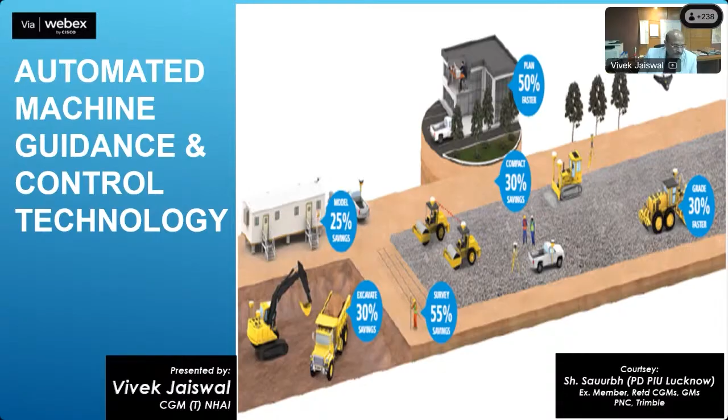As our chairman sir has directed, we are adopting these technologies and trying to do some work with this technology. Accordingly, our member sir, Anil Chaudhary sir, has guided us to process the complete system of its implementation. Before that, let me inform you.

This technology is being implemented in NHAI at one of its projects at the Lucknow-Kanpur section by our project director Saurabh Chaurasia. He is doing dedicated work in this field, and he has even created audio clippings for all of us. I'll share those audio clippings also with you all.

Let me tell you that this technology was first started by our ex-member R.K. Pandey sir and his team. When Giri sahab and Naveen sir took this up, they got cognizance of this technology and then included it in one of the projects in Lucknow-Kanpur. Accordingly, that work has been started by PNC, and PNC has consulted Trimble to help us implement this technology.

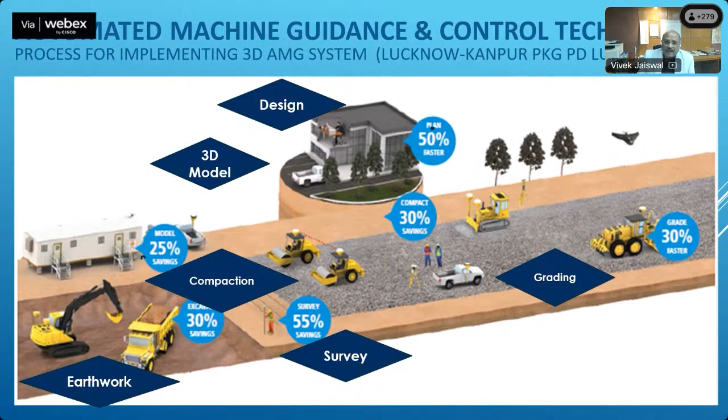Before that, let me tell you today's contents: the governing IRC guidelines and MORTH specifications, then the general process, then the basic principle of this technology. Then we will discuss the available systems to adopt the 3D automated machine guidance. Then what expected output I would like to demonstrate, then its financial implication and implementation procedure, what we have adopted to implement in all our projects.

In the present scenario, after observing the success on our package, we have introduced to the DPR cell a text in Schedule D, which I'll discuss with you in the last part of this presentation.

First of all, the IRC specifications where compaction and compaction equipment have been mentioned. It is mentioned at para 4.3.3 of IRC SP 97 2013 that the intelligent compaction system has to be adopted.

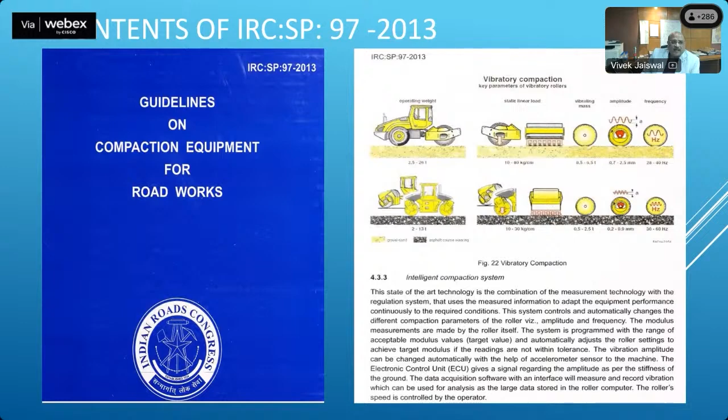This is one of the things we have to address through this technology, and we are trying to adopt this. Further, we have to lay the embankment in layers of not more than 250 mm. This is one of the factors where we generally face a lot of challenges, so this can also be addressed, that every layer should be done in a thickness of 250 mm.

This earthwork part is generally done by subcontractors and petty contractors, so the quality has to be ensured. Even the main contractor is sometimes not able to address that quality. So let us proceed with the technology so that it automatically comes into the process. That is what we have tried to adopt. Laying the embankment, subgrade layers in 250 mm or 200 mm thickness, this can be achieved through this technology.

Also, one of the things is the level of the surfaces - our WMM surface, earthwork surface, or subgrade surface - has to remain within the tolerance limit. The tolerance limit is somewhere around plus minus 20 mm, and in case of subbase it is plus minus 10 mm. So these surface levels have to be maintained within tolerance limits.

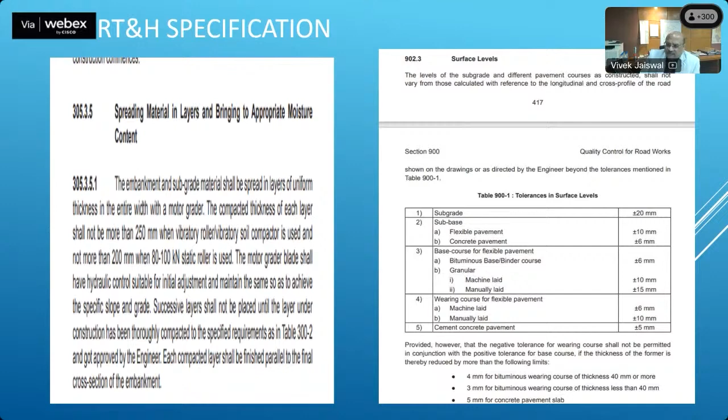This helps us because whenever there is a sag, water may get accumulated in that sag portion, and that will gradually deteriorate our pavement because of that. So we will try to keep the surface levels within tolerance limits through this technology.

Further, in IRC 97 itself, there is mention about the laying temperature and rolling temperature. This can also be addressed when our paver is there - the sensors will be there and we can map the laying and rolling temperature.

And now the compaction part. This is the main thing mentioned in para 4.3.2 relating to relative compaction. Let me read this text, what we are going to do with the help of it: the compaction analyzer registers all the CMV - CMV means compaction meter value - this data, and allows the operator to see the compaction result on the computer screen.

This is what we have done in this technology. A computer screen has been provided in our grader, in our compactor. All this can be seen in a video.

I'll show you. On the basis of experience or existing calibration, the CMV limiting value can be used for each separate compaction job - each layer or each particular segment. Now the compaction analyzer indicates each area that requires additional compaction. This can also be seen, I'll show you how this can be achieved.

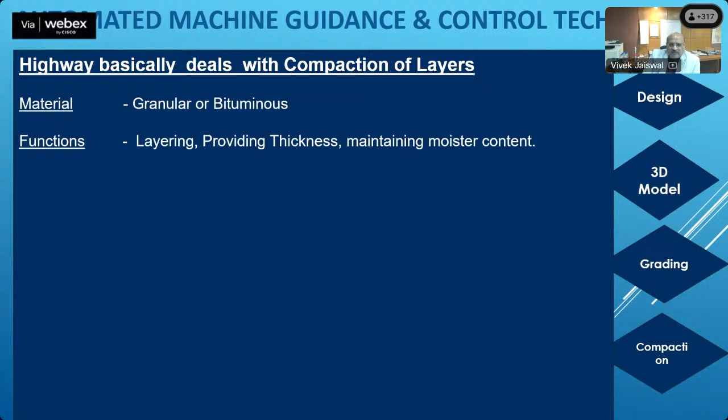Today we are discussing only the compaction part, because once we address compaction, a lot of hurdles will be removed. As you see, our Delhi-Mumbai expressway is attracting some criticism, but just because we have missed some compaction quality, our whole bituminous course is getting deteriorated at some places. But anyway, by adopting this technology we can improve this, and for these functions we are adopting this grader, soil compactor, and paver.

Then, by doing all this, the controlling factors we need in the geospatial thing are positioning, horizontal coordinates X and Y, then compaction, then levels and degree. Positioning can be achieved through GNSS and DGPS, and compaction can be done by our vibratory based sensors and roller passes. Levels can be achieved through auto level and GPS. Temperature can be captured by sensors and infrared.

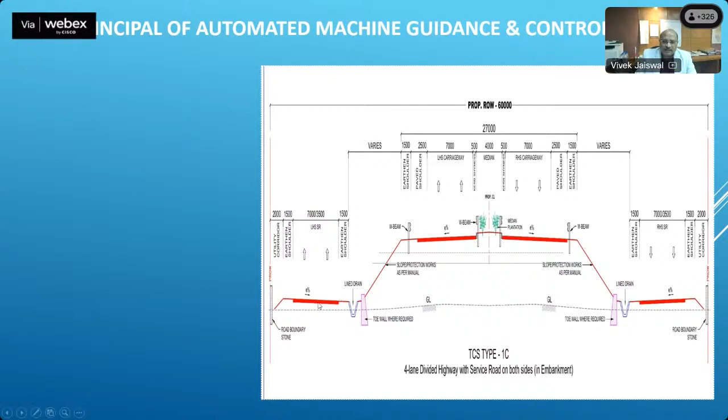So here is the cross section, and these cross sections are being controlled with level and positioning by sensors, software and DGPS for our embankment, subgrade, GSB, DBM, BC - these courses, right?

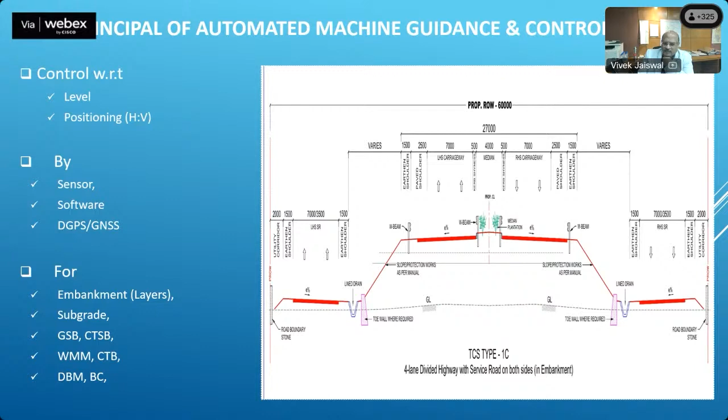Now, this is our bed. In this bed, this compactor or paver or grader is working. Now its vertical position will be controlled with this technology, where our compactor, grader or paver is moving, at what elevation it is moving.

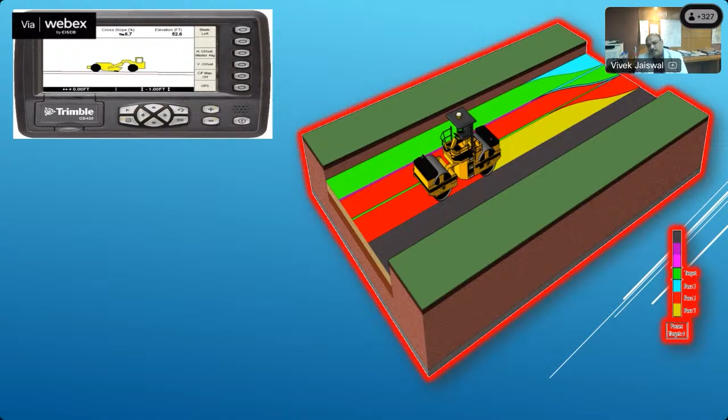It is so precisely being captured. We are able to capture it to the tune of 20 mm, 15 mm, and with the use of this robotic total station, we can achieve it to the level of plus minus 5 to 6 mm. Further, its horizontal positioning can also be controlled - the horizontal positioning of this equipment - and we can control the compaction part.

Now, how does this technology work? Basically, from the design, we already know the XYZ coordinate of that intermediate level or layer or the finished road level. So we monitor the positioning of these equipments, our compactor, our grader, through this satellite data, geospatial data.

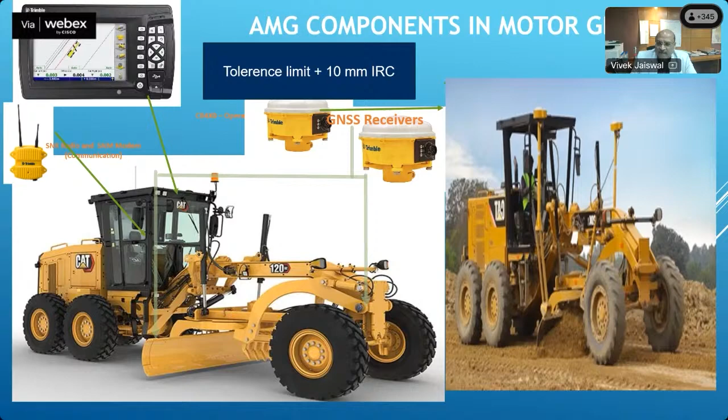And this complete system is now free of all this putting of stakes and strings. This complete process of automated machine guidance automates the process of laying and compaction. You can see in the pictures that generally we have to adopt this process of surveying, and the operator has to depend on the surveyors, who direct what level we have to achieve. So all this will be eliminated, and we can do the work even in day and night with quality. Also the human safety hazards can be eliminated with this technology.

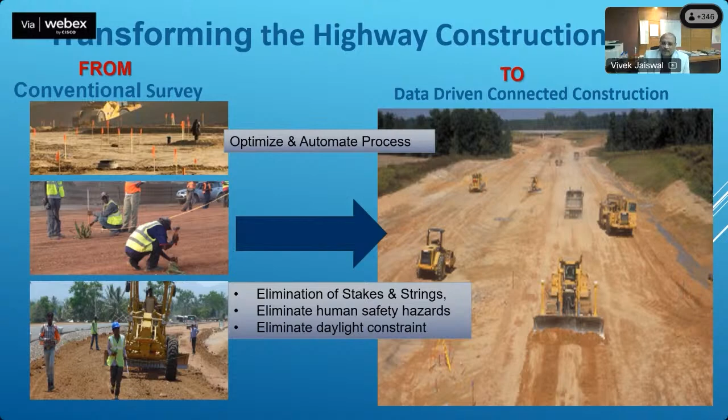These are the things that we can fetch out from this technology.

Now let us discuss the output of this grader. As you see, this green part and blue part at the end here—this is basically the portion where the grader used to raise by 250 mm and keep the layer in 250 mm thickness. Anything which is left or cannot be achieved is recorded in the color coding form.

So this technology can be used to get data in the form of color coding for adopting construction of embankment in layers of 250 mm or 200 mm, which can be automatically recorded in this system, and this data can easily be discussed with contractors. Even the contractor will try to keep everything within the tolerance limit, like laying layers in the thickness of 250 mm. This challenge of laying the embankment in layers can be achieved and brought into the process through this technology. This is what we understand from this, and we are sharing it with you. Further, any enhancement in this can also be pointed out by you so we can proceed with that.

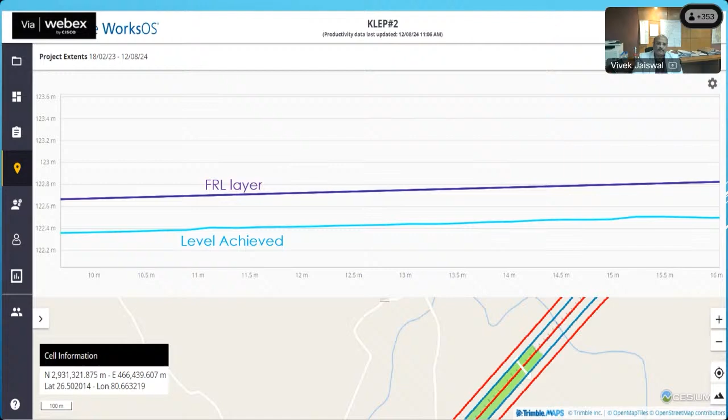Similarly, we can also get what FRL we have to achieve and what level we have achieved so far. This data can also be fetched from this technology. Also, for a stretch of 10 kilometers, we can see what level has been achieved—this is the OGL, then what is the subgrade level, what is the CT GSB level, what is the WMM level, and which stretches have achieved what level. This can also be fetched as an output from this complete system.

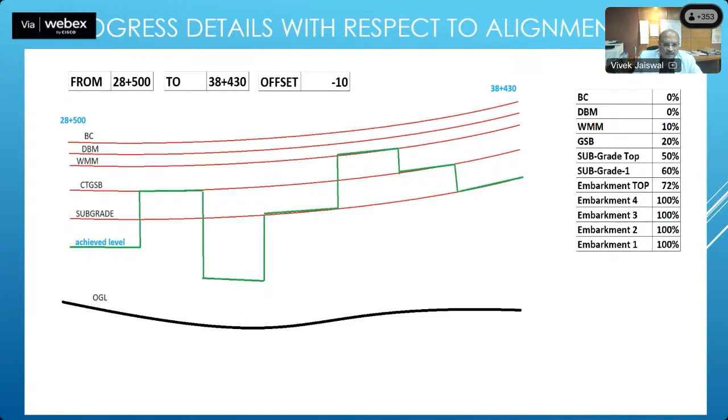Now, this is a compactor. In this compactor, we generally put this CM310 compactor meter in the roller. With the vibration of that, we can capture the compaction value. Here also the GNSS instrument is there to relay its position.

Now in this process, at present we have two things. We proceed with our test bed in which we do the sand replacement method for our FDT, where we have to achieve 95% of lab density. In that case, we decide the number of passes required to achieve this 95% field density. At the same time, we calibrate the field density achieving the level of 95%, and what CMV value is required for that. So that CMV value can be checked and fed into this system to know the compaction of each part of our stretch.

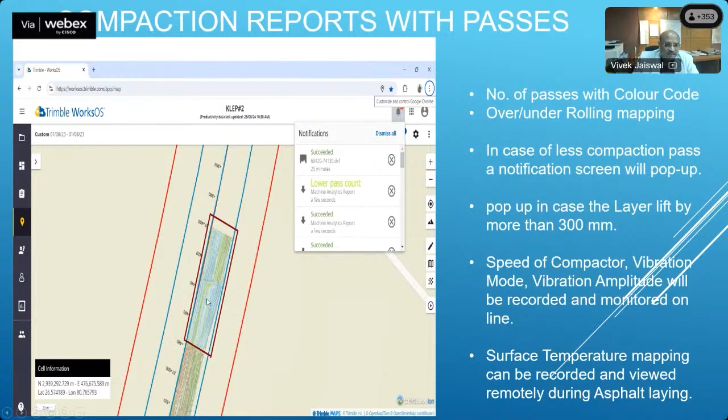Now in this case, the number of passes—these are the number of passes where we have given different colors. You can see where the number of passes has been achieved and where it has not, where 2 passes have been done, where 5 passes have been done. With this data, you can see where the required compaction or required passes has been done in the stretch, and this data will help you decide whether we can proceed to the further layer or not.

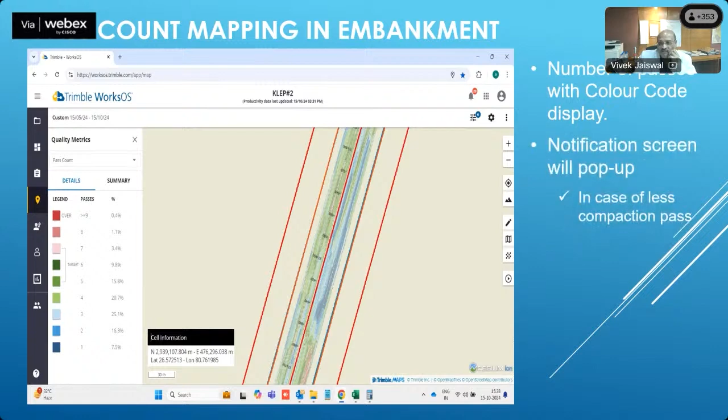So this is the example of pass count, number of passes shown with color display, and also notification in case of less compaction. Here also, as I explained, we calibrate the CMV value. In this stretch, we decided a CMV value of somewhere around 20 to 12 for our compaction. So whatever stretches have loose pockets of compaction can easily be seen here with the blue part.

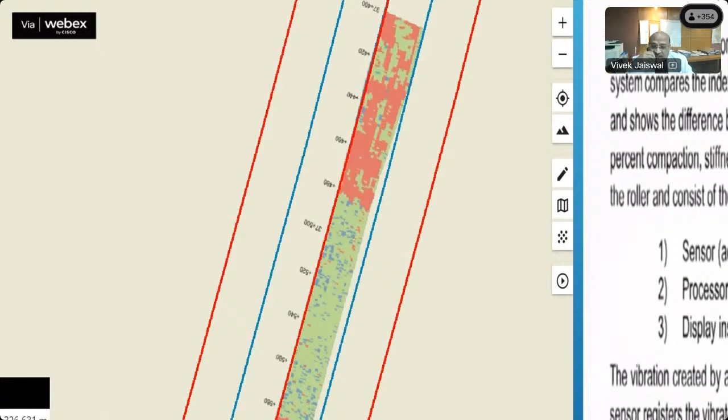So these are the loose pockets. Last Saturday, Secretary Sir was asking about where we can do the test. So from this technology, we can find the locations where the loose pockets are there, and we can do our testing in that location so that we can achieve compaction in every part of our segment.

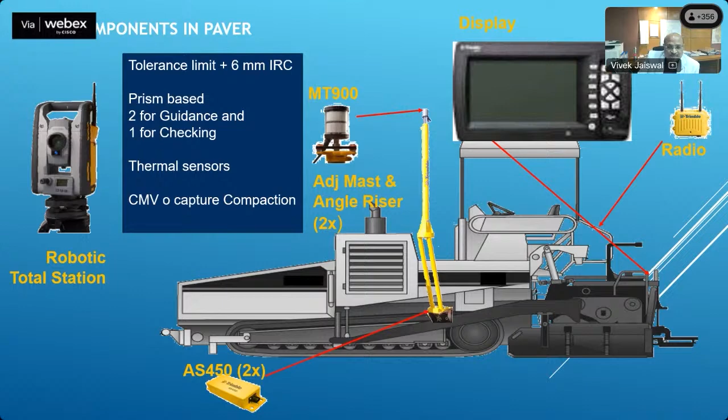So, generally, we put this total station which guides this paving machine to lay the proper thickness of bituminous material. Even for WMM, we don't require this total station. We can do with the ordinary GPS system.

Now, with this technology, we can get the quality in grading, passes, compaction and paving, and get the progress at interval level remotely sitting in our offices, recording the compacted soil stiffness with the color display.

Built data can be achieved on a daily basis. This technology is attracting us because all this day-to-day data, within 24 hours, we will be able to get it and utilize this data in our digital twin. In digital twin, you can easily put the progress, and that progress will automatically be fetched from the site into our digital twin model.

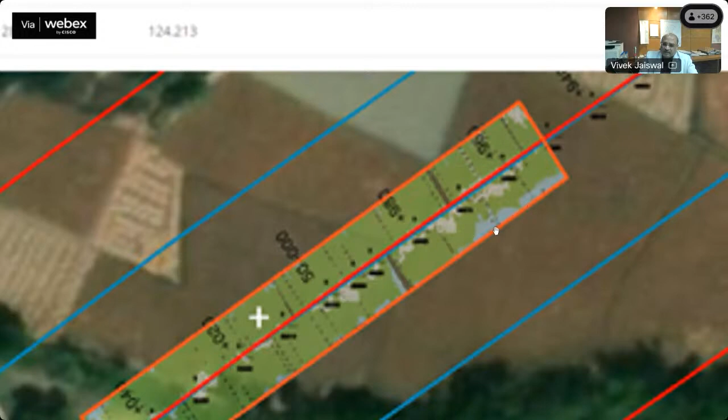Now, in case of paver, we can capture the temperatures. See in this portion, there is temperature difference. There are certain pockets where the desired temperatures were not there. So in this way, we can get the results.

In this particular stretch, if you see, the laid temperature is less than 70 degrees, then 70 to 140 degrees, then more than 140 degrees. No stretch is more than 140 degrees. Most of the stretches are generally 70 to 140 degrees.

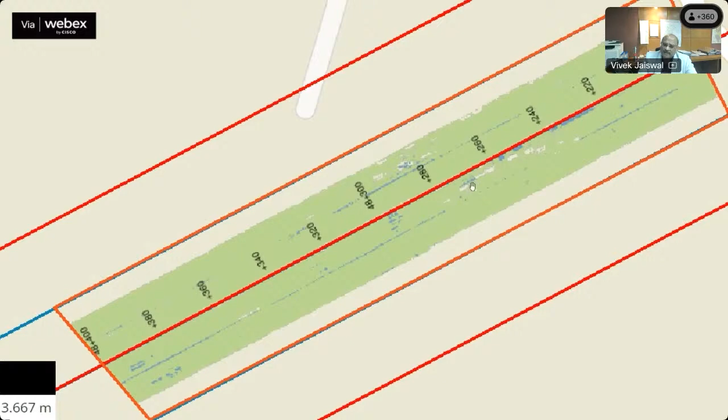But there is a line where the laying has been done with less temperature. So this data can be available with you through this technology, which can be utilized for further necessary action, whether to do some mitigative measures like sprinkling sand if the authority engineer permits, or whatever mitigation measures we have to decide accordingly for removal of these uncontrolled temperature spots.

These are the certain points where we have captured the data for temperature. So all this data can be fetched out from this technology. And later on, as you go ahead with this technology, you will find a lot of improvements and suggest a lot of things that we can fetch out from this technology.

Just see this, Saurabh, our PD in Lucknow, has done this charting. In this chart, you can see the tolerance limit of the DBM layer with the conventional method and with the AMG system. In this, every pocket, this is 0.41, 3, up to 16.5 meters, and for every 10 meters of chainages, the levels have been taken.

The levels which are more than 15 mm have been pointed out in red. So in the conventional method, we have this much of discrepancies, but by adopting this AMG technology, we are able to remove such red patches. We do not get these red patches with this technology. A better level, or better SOP, is achieved in case of AMG for keeping the surface level within tolerance limits. So this is the result that we are getting from this technology.

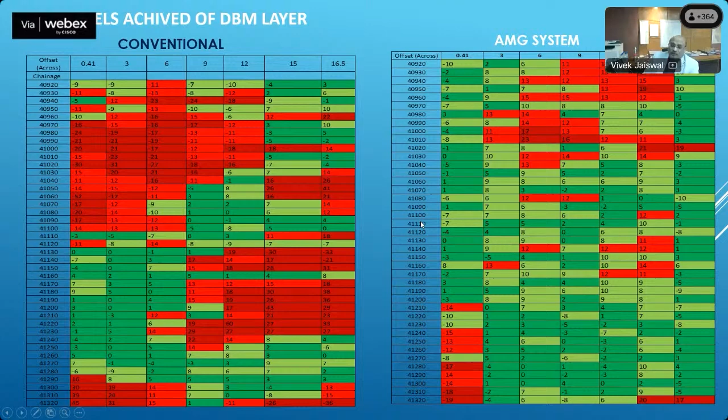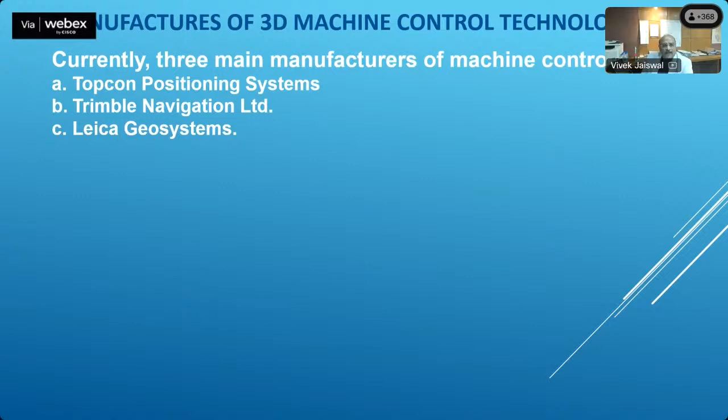Now, how many manufacturers are available for this technology? One is Topcon Positioning System, another is Trimble Navigation, and this Trimble Navigation is helping the PNC for doing the work in Lucknow Kanpur. This Lucknow Kanpur stretch can be seen, and our PD Saurabh Chaurasia is already available to guide all of us or to share all the information. And another company is Leica.

If we see for a project of 35 to 45 kilometers for 2 years, it is generally costing 800 to 900 crores. The requirement of such equipment is, we have assumed grader to be 5, compactor to be 4, paver to be 2, then again tandem compactor to be 2. There may be some more pavers which are not deployed with this technology, that can do the primary or initial work, but finally at the final stage of layer, we complete the process with these equipments. So these equipment will generally cost us around 7 crores.

Nowadays, it will definitely come down when we use this technology in all our projects. Cost of this technology will come down, but at present it is somewhere around 0.75% of the total project cost, which is nothing. The comfort that our PD, our authority engineer, and our contractors are getting from this, the speed of construction that contractors are getting from this, is much more advantageous rather than investing this 0.75% in the total project cost.

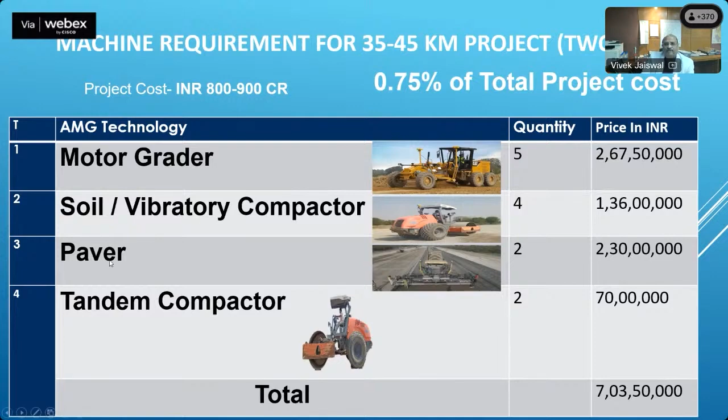These are certain things that we have planned. What should be our output in motor grader? The embankment layer thickness of 250 mm as per IRC 305, that can be done and reflected in color coding, as mentioned in the third column.

Similarly, in case of soil compactors, the vibration passes for class 4.3.3.2 of IRC 97 can be done with the color coding. And in this case, the loose pockets can be identified in the percentage of area.

Now, our IRC in the coming years, we have to include that any stretch which has less than 5% or 15% or 35% of these loose pockets, this has to be redone.

At present, what provisions do we have? For every 1,000 cubic meter of earthwork, we have to do a test of sand replacement. And for a thickness of about 250 mm in a width of 30 meters, at every 133 meters, we have to do that test, and that test represents this 133 meters area. But in this case, the compaction is available at every point, at every pocket, you can fetch it from this technology.

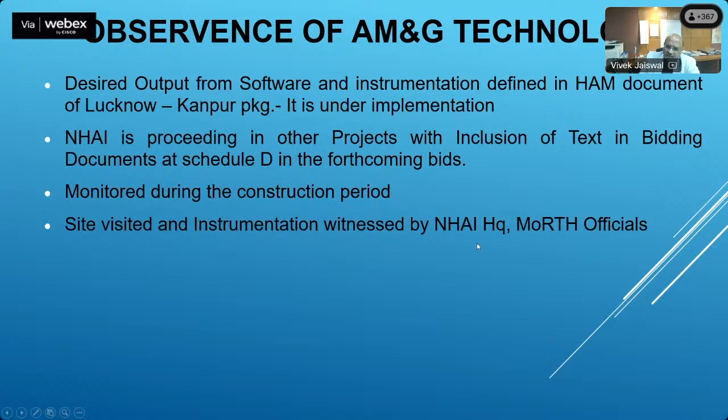This complete system has been monitored. The site has been visited by NHAI headquarters as well as MORTH staff, along the Lucknow-Kanpur stretch.

There were certain challenges, like availability of network, accuracy of the established TBMs, analysis of the reports, trained operators, and limited agencies to assist in implementation.

But anyway, by disseminating this information, our chairman sir has taken this initiative and asked us to disseminate this information to all the stakeholders.

Accordingly, we are proceeding with this capacity enhancement program, and we are putting this in a workshop to be conducted on the 3rd in the afternoon session, where after seeing this, you can put your questions and queries so that we can note them, address them, and include them in our complete system of adopting this technology.

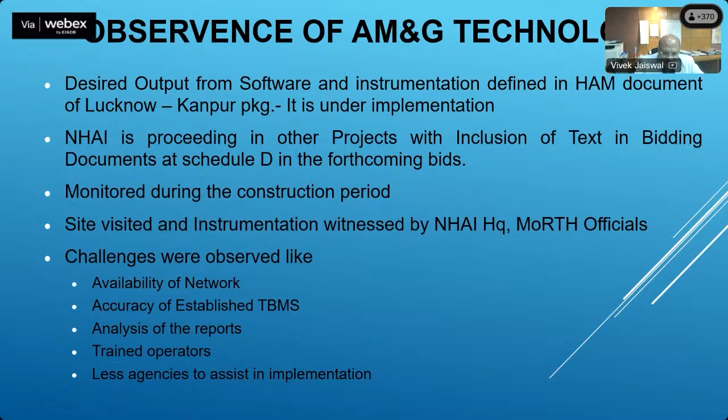Further, the key points of the text to be added in Schedule D are: we have introduced the definition of the machine guidance control system, and the obligation of the concessionaire, mentioning that this will be done at his own cost.

Like he is using the grader, he is using the compactor — similarly, this technology will be equipped on those instruments.

Further, for the construction of projects, detailed specifications have been mentioned, including information about the centralized monitoring software, and preparing the design data and processing results.

3D machine control system for motor grader for accurate grading to design, then for pavers and compactors, capturing the temperature, and also the data file transfers from the CMS to our digital twin model — all these things have been mentioned in that text.

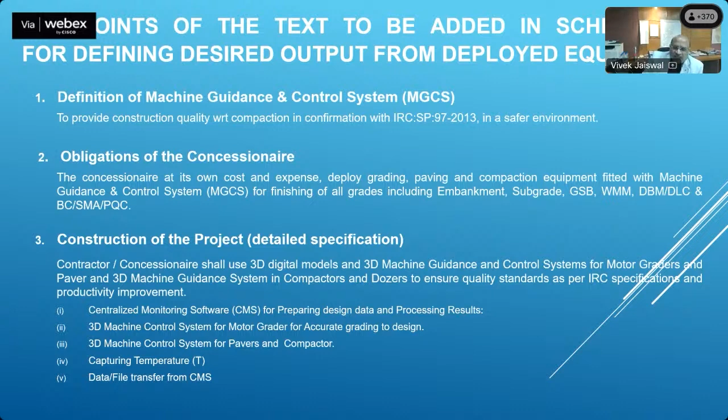This is the sample of the text that you are going to put in your Schedule D.

I request all the GMs, CGMs, and PDs — this text is already available, and I will share with you all what chairman sir and member sir have seen and corrected, and now it is ready to use in our contract document in Schedule D, and also the text to be mentioned in Schedule B.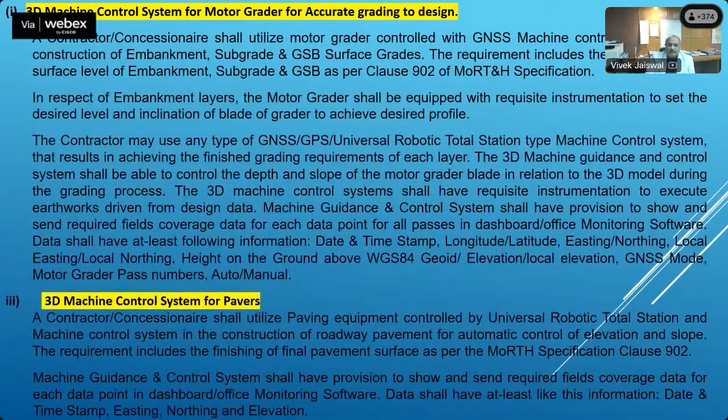Now, this is today's subject — the machine guided control system. If any questions are there, we will definitely deal with them today as well.

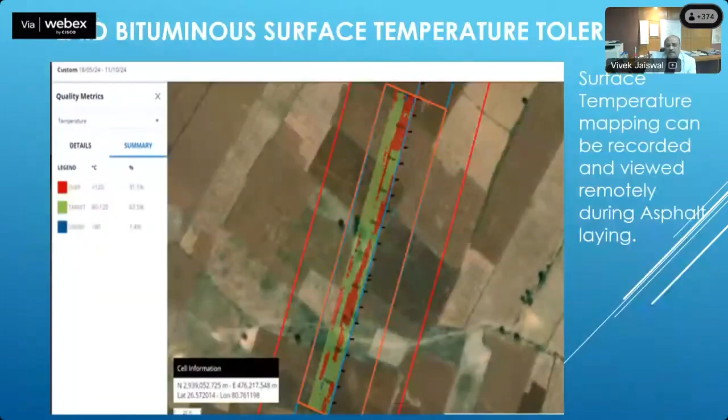I have shared this whole information with all of you to get ready for the workshop to be conducted on the 3rd, and we will discuss the same thing with the digital twin also on the 3rd of January, so that we can come out with other challenges which I have not covered, and you can suggest improvements that can be fetched from this technology.

So let us stop here with this — oh sorry, the automated machine guidance control system.

Now let me give you a small introduction to digital twin also. This is another thing that our chairman sir has desired, so that we can adopt the geospatial policy of the Government of India.

For our digital solutions in advancing India's highway infrastructure — in this digital twin, let me tell you what we are basically going to do, through the slides.

The National Geospatial Policy 2022 generally caters for digital elevation model, geospatial knowledge, mapping of surface and subsurface infrastructure, and digital twin for major towns and cities.

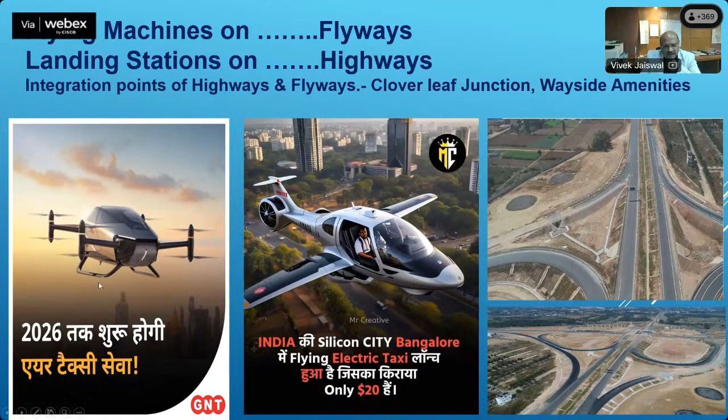In the coming days, you can see this news, air taxis are coming. So we have to integrate these flying machines to land besides our highway. This is one intersection in the Bangalore-Chennai Expressway where RO Bangalore has identified black spots for landing of these machines. So these are the things we have to do keeping in view 2047.

So for this digital twin, Chairman sir has floated the concept in April, to create a model or to do BIM for the highways. BIM is generally used in buildings and used by various other agencies. So we have also adopted it in two of our projects: one is the DPR of 104 kilometers in Chhattisgarh, and one project of 29 kilometers in Bihar. The process of creating this digital twin is underway. This will be discussed in the later presentation.

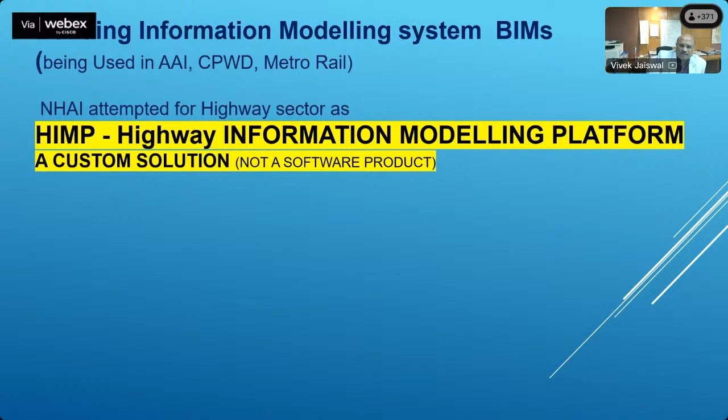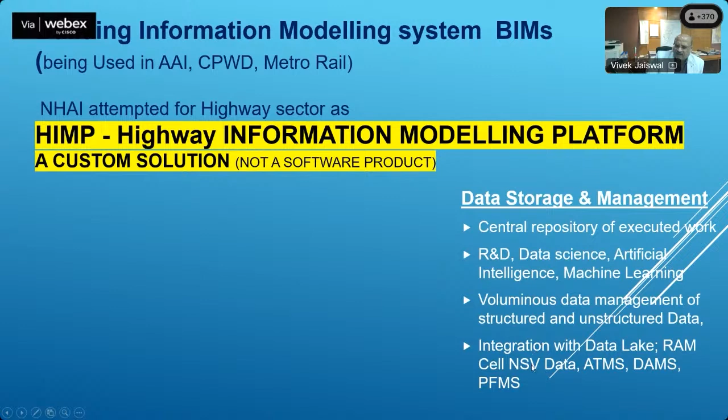What we are going to do in this building information modeling system, which is being adopted by the Airport Authority of India, CPWD, Metro Rail, NHAI has attempted for a highway information modeling platform. This is a customized solution, not a software product. In this we will manage complete data management, a central repository of executed works. Then from that, data science and R&D will be done. The voluminous data will be handled, with integration into the data lakes we have developed.

And in this digital twin platform, what we will do is a design-driven 3D digitized model with walkthrough. It is a digital twin. We will do a design-driven 3D digitized model of our project. What we have envisaged in schedule B and C will be reflected in the form of a model, and this model will be featured with scheduling.

A lot of our officers tell us that we are not concentrating on the scheduling part. We don't know, out of a 50-kilometer or 47-kilometer project stretch, which segments are on the critical path. Critical path means, with the decided number of resources, how many crushing plants and bituminous plants are there. With respect to that, what are the segments on the critical path? This can also be captured through this digital twin.

Even time-based costing can be done. As soon as you progress your work, your value will automatically update. This much value of work has been done after approval of your RFIs. Then a 3D machine guided control system will also be there, and this will be powered with artificial intelligence. Later on, it will be developed by you people into different updated versions.

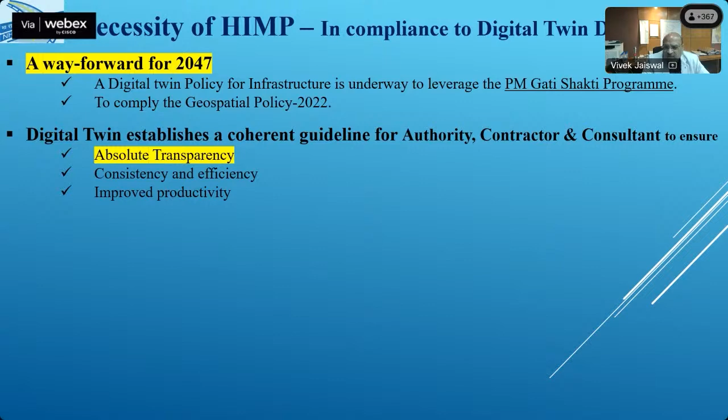Now with this digital twin, we will address the quality and compaction part as I already told you, then certainty, project completion, land acquisition and possession, and working with insufficient survey data. This is the main challenge we face, because a lot of agencies are doing the work without survey, without GPR survey, without knowing what's under the ground.

We are proceeding with this, and mitigating those things in the form of change of scope. Later on, when this complete highway information modeling platform becomes matured, we will totally remove this COS and EOT. This will become history once the platform matures. At present, it is only a concept, and it will be improved with your suggestions.

Also, the lack of control over scheduling can be addressed through real-time assessment of desired extra equipment needed after a certain time on the project. Say a project is about 2 years. After eight months, the progress is only 2%. Now, what extra equipment is required will be triggered from this platform to the digital twin model.

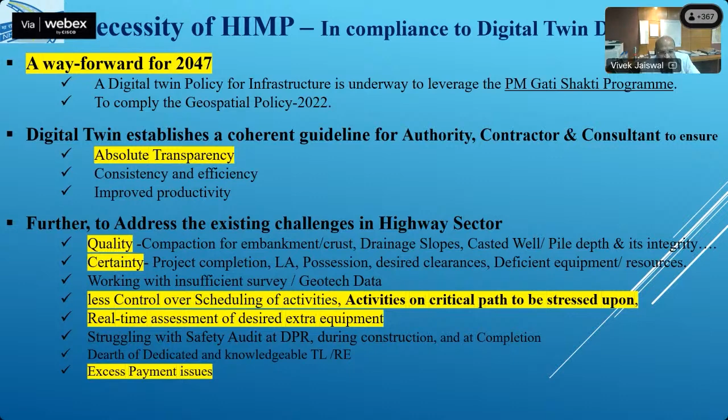Also, the system of excess payment. I have already told you about absolute transparency. So the payment will also flag excess payment or less payment. This can also be addressed from this platform.

If BOQ is available right from the start, the value is available from the start. Say the project value is around 480 crores and that is bid at 620. The BOQ has to remain the same, values remain the same, and in the end the rebate part will be deducted. But that BOQ should be taken by each of us at the start itself for the complete project. This will help in deciding the negative change of scope.

Nowadays, a lot of reduction in scope of work is coming from various PIUs, and we are not able to do that work. This reduction of scope of work, our senior officers have already planned and thought of. Now we are reducing it because, of course, when we are not getting the land, it's correct to reduce it, but it is not always advisable to reduce the scope of work.

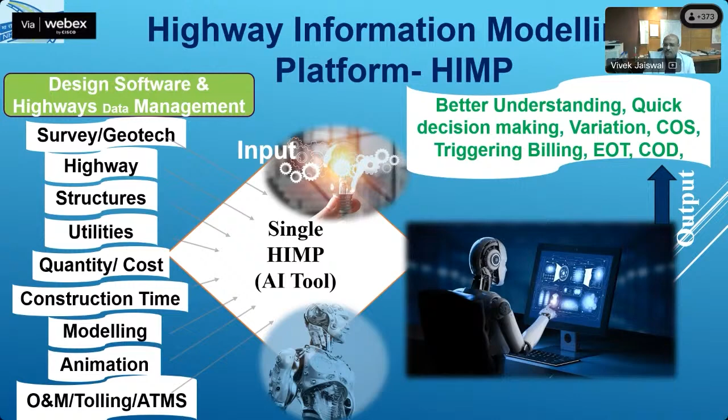But anyway, I mean the construction time, modeling, animation, O&M, tolling and ATMS - all these features will be brought to one platform. This is the Highway Information Modeling Platform, to improve our better understanding, quick decision making, variation, COS, triggering the billing, EOT, COD. This will be the output from this complete system. This is the pictorial view of that.

And what I want to say from the design driven model - you can see in this LS there is a flaw in this profile. Here it is high, here also it is high, here it is a hillock, where we are putting this profile at a low level and providing this retaining wall.

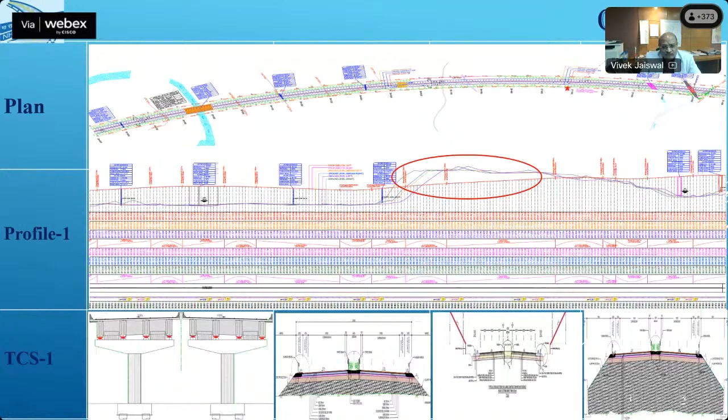Now let me introduce a concept, what you can call the conceivement of this complete thing, what we are planning to do from this digital twin. Just another 10 minutes.

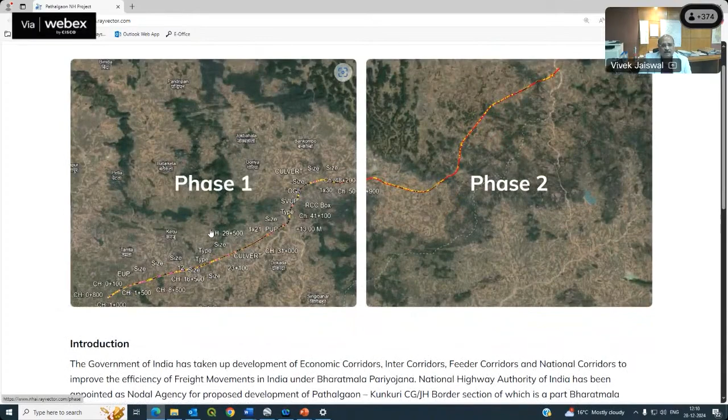So what we will do in digital twin or 3D modeling, this is a project of 104 kilometers of Chhattisgarh. This is 50 kilometers and this is 50 kilometers. So we have introduced here our complete DPR.

This is not in the digital form because at present we are not ready with the digital drawings. We have only the PDF copy of the drawings. So we have already included all the DPR contents here, like this cost estimate.

All the cost estimate has been mentioned here. Then this drainage plan. This drainage plan is a PDF copy, but we have to keep the digital copy of this so that we can operate and move or use the model in digital form. So this is the thing.

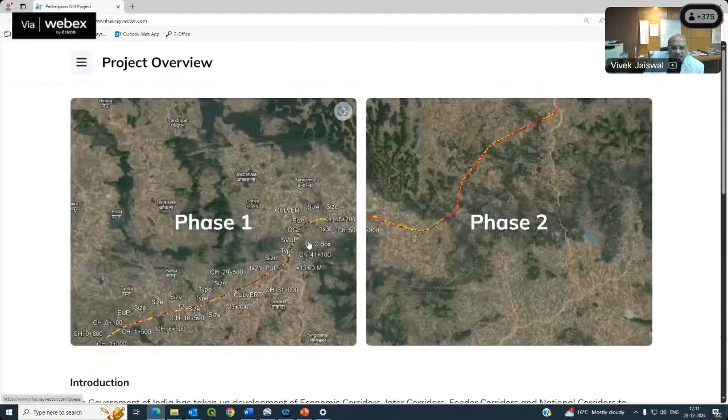Now, when we click, these are the various stretches. In this 104 kilometers, there are 20 cross sections, and those 20 cross sections are used about 697 times. Say 70 meters, 140 meters, bridges say 40 meters. So those 20 cross sections have been used about 697, about 700 times. So 700 segments of estimate will be created.

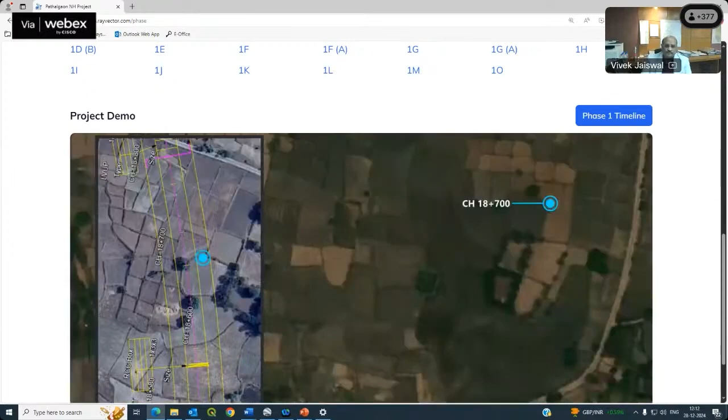Its timeline will be created, and accordingly it will be linked on this platform so that we can get the information at any time. Now, that 3D model will be something like this. This is the thing what we have envisaged in schedule B and C.

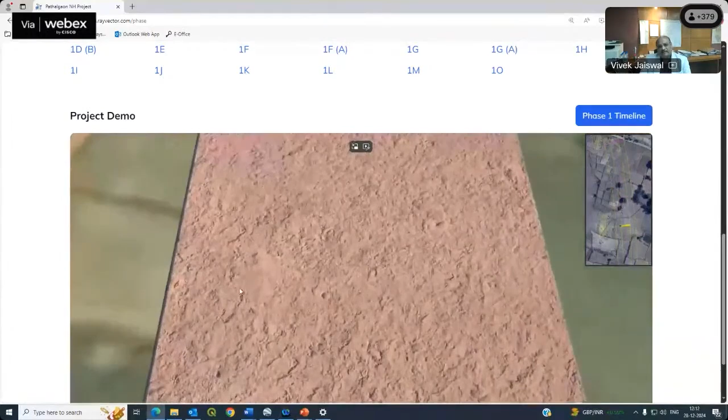This is on our satellite map. This information, the information of earthwork, will come through our automated machine guidance control system, and we will create a 3D model during the construction as a part of our digital twin policy.

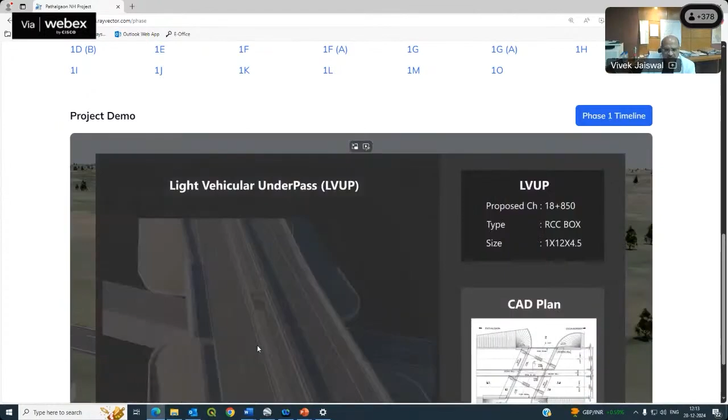You can see this model has been created. It contains a LVUP, it contains a flyover, it contains a bridge. So now you can see in this complete model, we have this drawing.

This drawing, this CAD plan is there, in which we have not paid attention to provide a chute drain. Now, whenever rainfall will come, the water will accumulate here. So this thing, through a model, we can improve. Even in this drawing, the connection between this W-beam crash barrier and the parapet wall of this culvert has not been connected. So this drawing, this model didn't connect this.

So all this thing, when we will see in the form of a model, we can see these are the things that we have to improve. This is the example of the modeling part that we can improve or virtually construct our projects.

Now here you can see these chutes. These are not connected to this drain. This is the part that we have to improve in our drawings.

And when a contractor will give this model, you can easily see the things in the starting itself, what are the lacunae, in case of marking, in case of putting these electric poles. Further, you can see this line drain has not been extended.

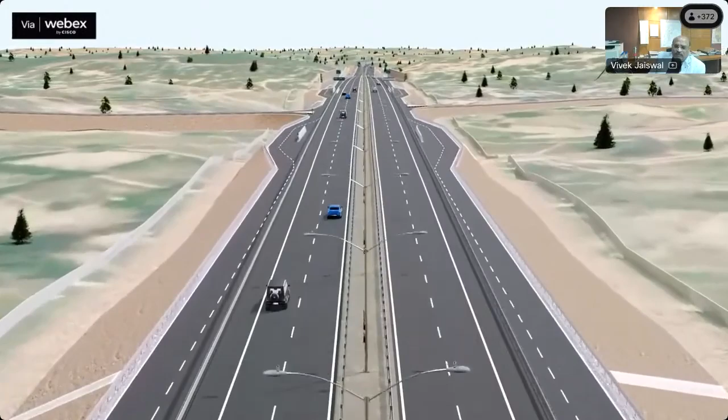Nowadays, there are certain consultants which are using this, but all the consultants are not using it. We have to ask them to please use this so that we can improve our DPR part also, and we can improve our DPR by constructing or not constructing, by creating this virtual model, by utilizing this highway information modeling platform.

Now, in this case, you can see this is a flyover. In this flyover, the drawbacks in our islands, let me tell you a very small thing. When a person is coming from this side and going towards this, it will have a difficulty at this point. This notch will interfere in going from this direction.

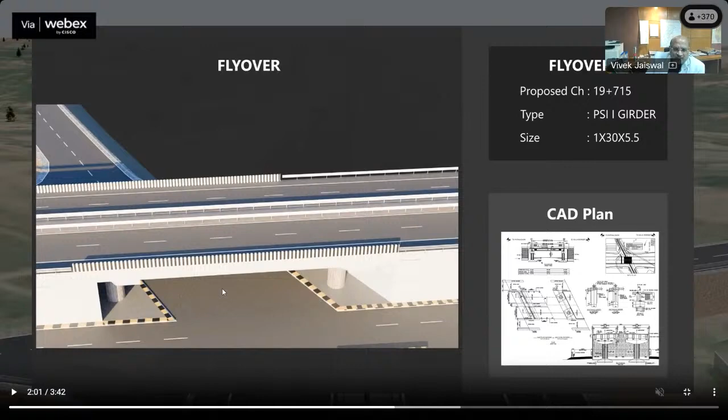All this thing has not been covered in this drawing. That is why the model has shown this. We have to do the blunting of this structure here. So as soon as we see the model, we can improve our drawings and DPR part and correction also.

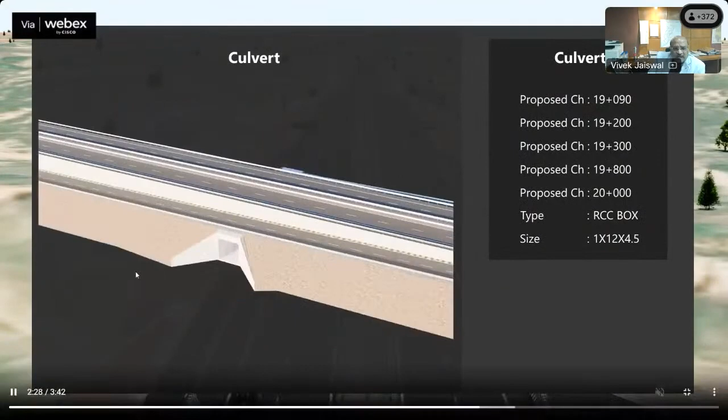One more thing I would like to share with this model. Here also you can see in one of the segments the culverts have been provided, and even our service roads are kept at a height of 2.5 meters.

These service roads generally cater to the adjoining people, but because of this culvert we kept this road about 2.5 meters high, or 1 meter, or 1.5 meters high. By keeping the service road at a higher level, generally people create problems, like in Doddaballapur, Karnataka, when I was there from Devanahalli to Hoskote Road, people were not allowing us to do this service road because the level is high.

We keep the level high because the contractor has a tendency, or it is obvious, that the height of the RE wall will be less, and most of that part is used by earth. So we can take a cautious decision here, let us provide a causeway here so water can pass over the service road, or we can provide a series of pipes so perforation can be increased in the horizontal direction. All such mitigation measures can be taken so that the problems a PD or site engineer generally faces during construction can be addressed from the start through this model.

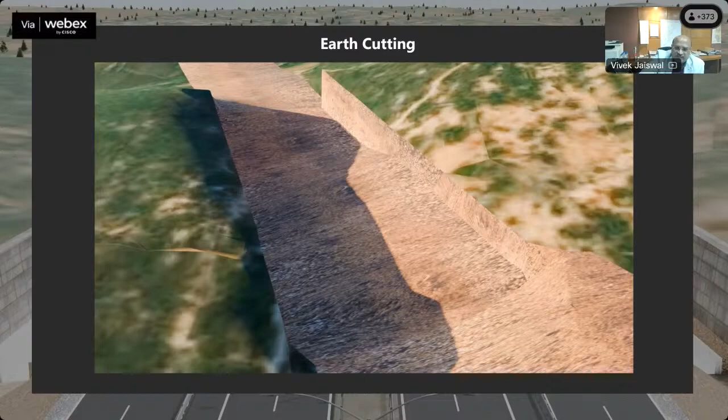This data will come from the automated machine guidance control system, and gradually it will build. Presently, the challenge we face is that the contractor generally provides a toe wall, whereas we have mentioned in Schedule B that it should be a retaining wall. So all these things can be sorted out at the start itself by creating this model.

Now here, one minor bridge is there. I have tried to capture through this clipping a flyover, a bridge, a retaining wall, to show what we want in our digital twin. We definitely invite your comments and welcome your suggestions for creating this digital twin, which our chairman has envisaged, so that we can improve our quality.

This is the design-driven 3D model that I have shared with you. Another two things you have heard of, 4D and 5D, also have to become part of this. So we have mentioned here the complete program of the project, which chainage will start at what time and end at what time. All this will be included in this platform, and it will be linked with our construction.

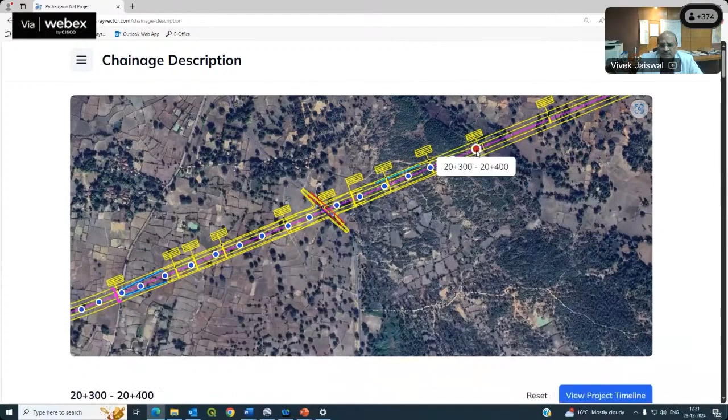Let me tell you how we have planned to address these things. The bridge that I showed you will be constructed, and its estimate is already there just below it. So as soon as the activity progresses, its financial part will also be updated. Nobody needs to depend on an officer to certify the payment. When this stage comes and is approved, the payment will automatically be triggered from this platform, confirming that the agency is qualified for the payment.

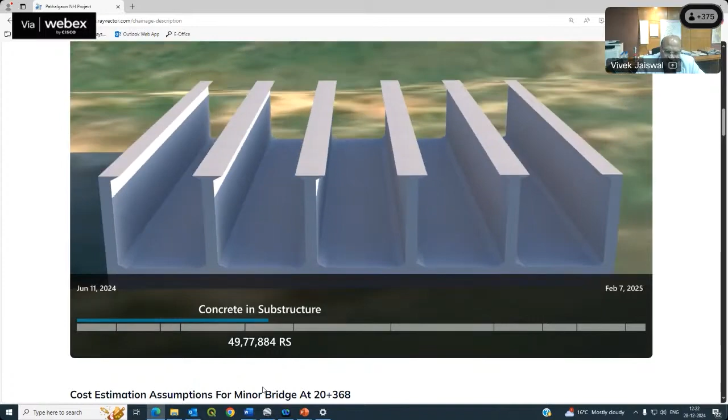So this concept, or this segment, will also be captured from this platform, the costing part, the time-based costing part. I mean to say, time-based costing part.

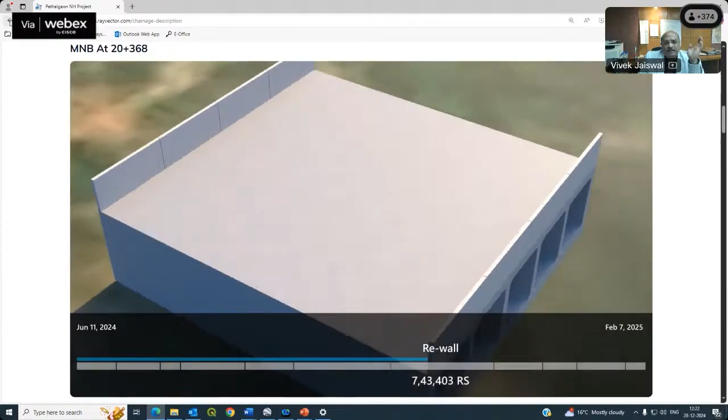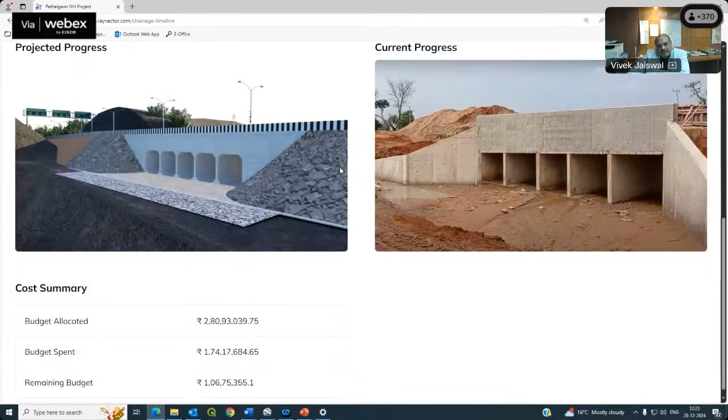As regards this, this is the different progress of the work. Whatever progress we achieve with respect to time, we will capture and demonstrate here with the percentage of progress. This percentage of progress will also be accompanied by further requirement of resources. If any instruments or equipment are required, that can also be triggered from this. This is what we have envisaged to incorporate in this digital twin.

So this is what I wanted to share with you all. Now I'll play a 2 minute video clipping that our friend and dedicated PD, Saurabh Chaurasia, has created for you all.

Yes sir, please pause for a moment, I am sharing this grading part. In the AMG technology, is it okay?

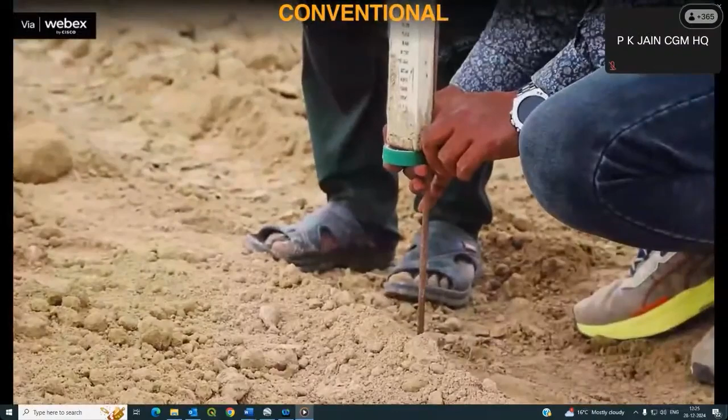The grader operator starts doing grading by breaking the heaps and doing the profiling on pure guesswork. Whereas the AMG technology essentially bypasses the traditional process of grading by using stakes.

Instead of giving site plans to the surveyor, who uses these plans to manually set the stakes, and then having the machine operator, visually guided by a site engineer, read those stakes, a 3D control system puts the site plan on a screen directly in front of the machine operator. An onboard computer in the machine's cab has a digital copy of the site plans stored in its memory, along with a machine receiver combined with various onboard sensors.

The grader operator breaks the heaps, and profiling is done as per the guidance received from the display mounted on the cabin. The operator can see the real-time cut and fill data of the profile, and he can spread the material accordingly.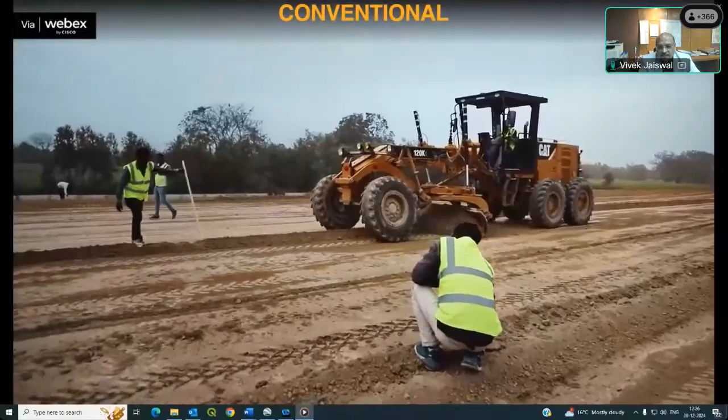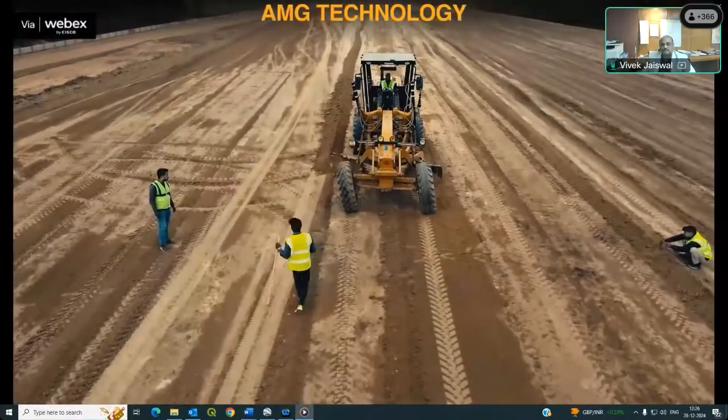In the conventional method, after profiling, the operator is purely dependent upon the guidance received from the site engineer, and while laying the material, he has to stop each time so that the site engineer can check the levels using measuring scales. Whereas with AMG technology, the system determines how far the cutting edge is from grade level and sends a signal to the hydraulics to drive the blade to grade level.

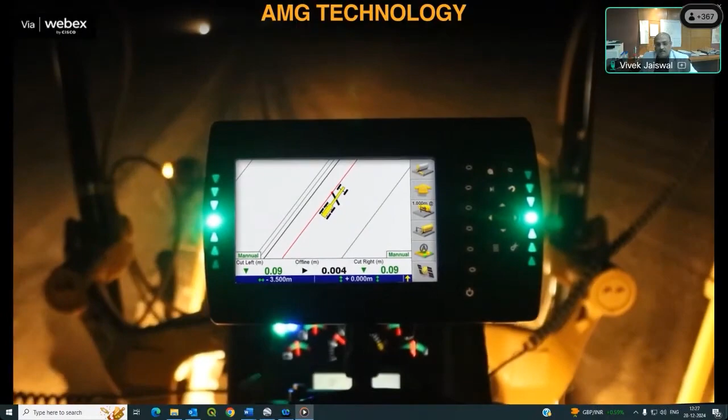The productivity achieved by using the technology is 336 cubic meters per hour, whereas with the conventional method, productivity can be achieved only up to 113 cubic meters per hour. Another advantage is that we can work day and night with the technology-fitted grader, whereas in the conventional method, operations can be done during daylight only.

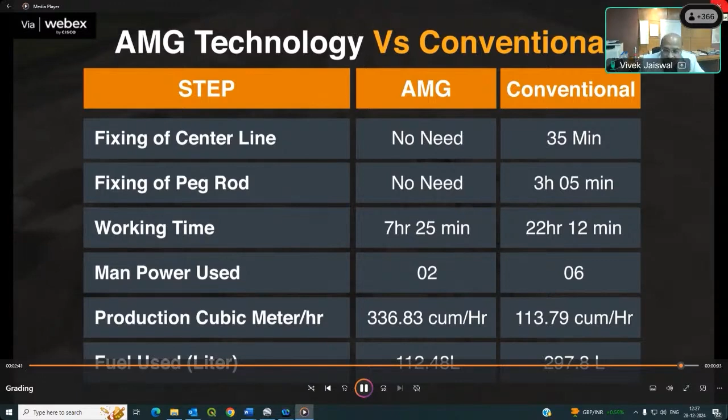Let me play the video of that compactor also.

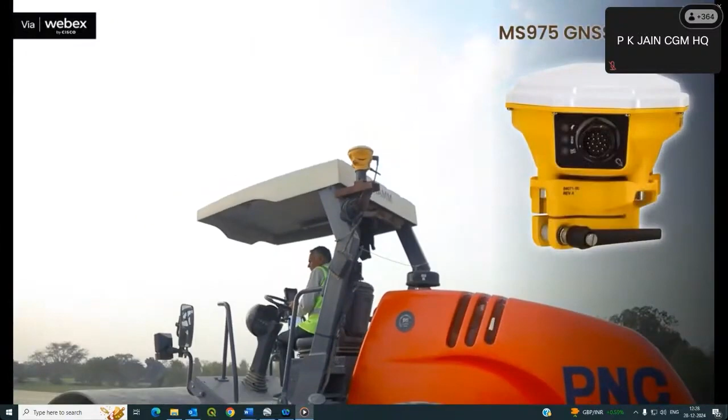Advanced compaction technology. Once the grading process is done, the compactor starts compacting the road using AMG technology. In AMG technology, a GNSS receiver is mounted on top of the cabin of the compactor, which helps collect position data of the compactor drum. With an onboard screen mounted on the cabin, the operator gets guidance about the number of passes, and once target passes are achieved, the screen indicates that area with green color.

The authority can monitor the compaction process remotely. In the conventional way, there is no option available to monitor the process remotely, and also there is no way in which the compactor operator gets guidance.

Also, in case of the paver, let me share how this project director has proceeded with this. Comparison of conventional paving versus automated machine guidance technology.

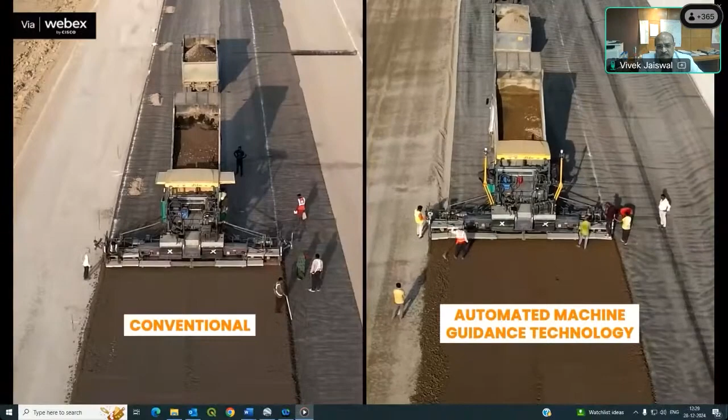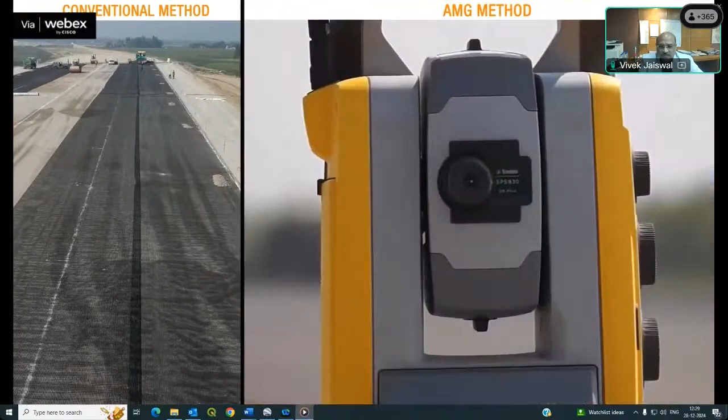In the AMG technology method, the surveyor starts with setup of a robotic total station using a known control point. After this, the surveyor connects the robotic total station with a 360-degree prism, which is mounted on top of the paver screed. The onboard system will calculate the position at the bottom of the screed edge.

Whereas in the conventional method, first the survey team will provide the center line and mark the points on the proposed bed, followed by fixing peg rods on the markings. After this, by using an auto level, the civil team member fixes the reduced level as per the FRL sheet of the proposed crust.

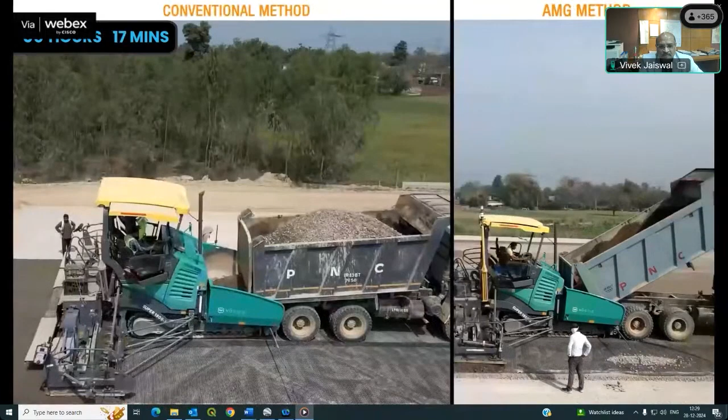The trucks start loading the material, and the pavers start to spread the WMM material.

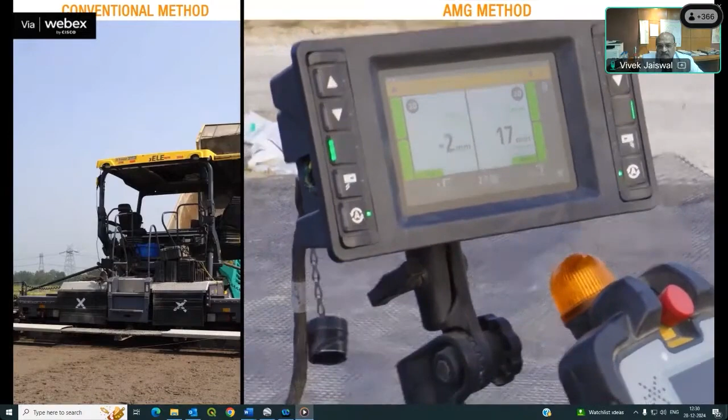In the AMG technology method, an onboard monitor is mounted on the paver in which the surface design of the proposed crust is loaded. The 360-degree prism calculates the current position of the screed, and through this the design machine calculates the level adjustment automatically. To ensure better quality with the help of a grade check system and controller, the engineer can check the grade levels easily during laying.

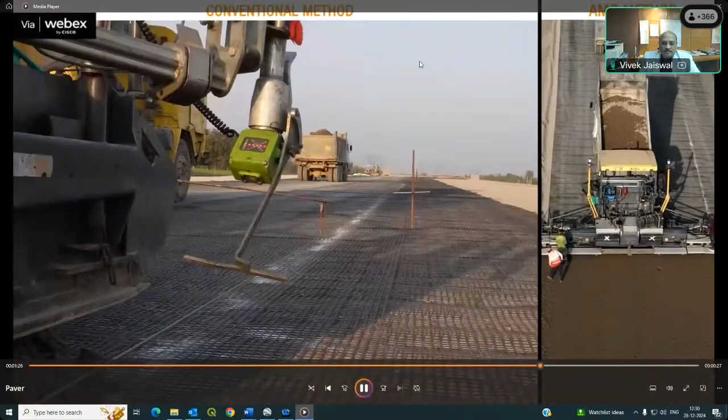In the conventional method, the paver follows a string wire using a contact sensor. By using a thread and a measuring scale, a worker checks the level of the layer. If there are any changes in the level, the worker adjusts it using the side panels.

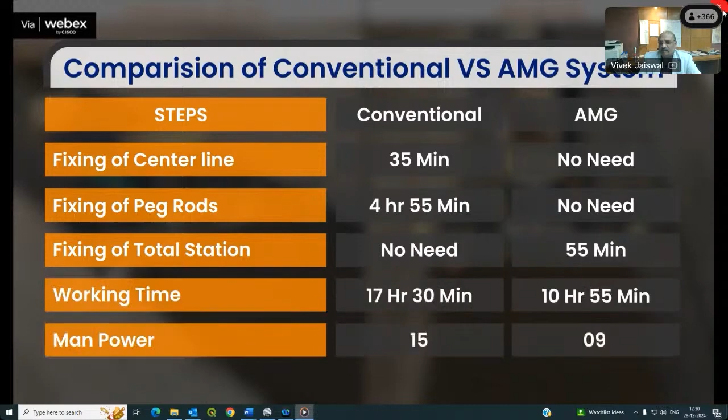I wanted to share with you all, let us go ahead with this technology and adopt it so that we can achieve quality work and convenience for us also.